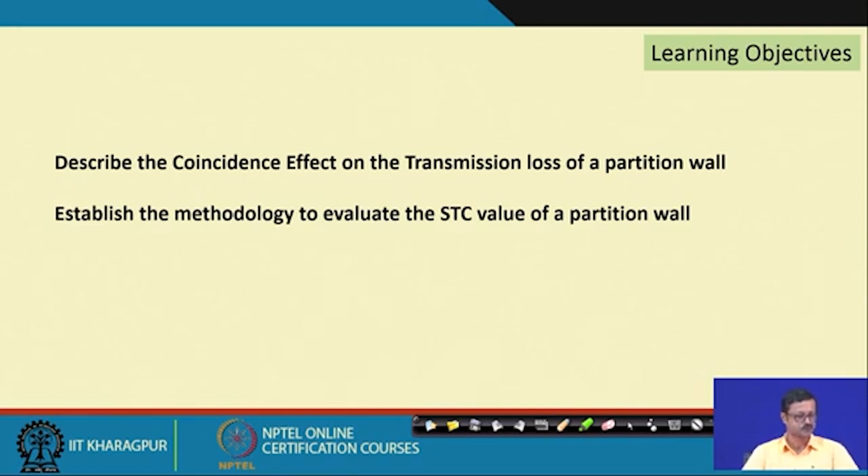Quickly let's go to the slide we already discussed in the very first lecture of our sound transmission, airborne sound transmission. This transmission loss, TL, depends upon two physical parameters. Of course there are various others, but these two are very important and very significant. One is surface mass of the partition wall, and another one is the sound frequency.

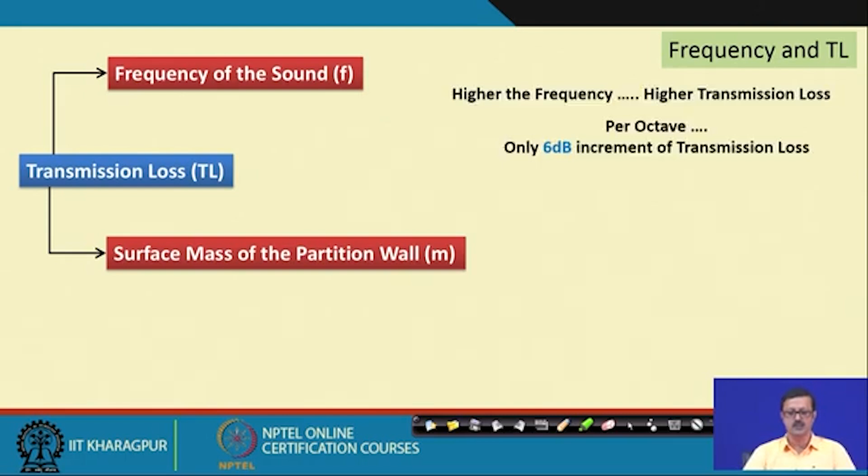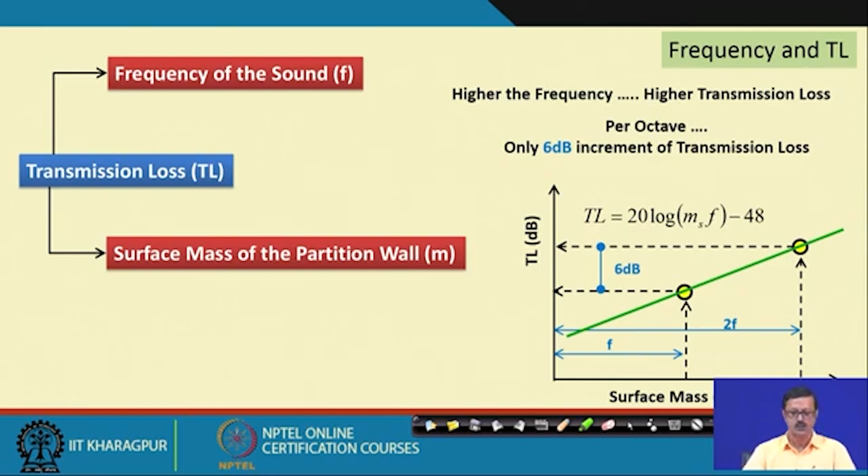As we understand, per octave increase in sound frequency, if it is doubled from the lower one, the transmission loss is increased by 6 dB. This follows a kind of steep straight line graph, where you can plot the frequency on the x-axis and the sound transmission loss on the y-axis, and you can see the transmission loss follows this particular straight line.

But in actuality you will follow this green line where there is a sudden flat plateau and then again there is an increment. If you produce this line with the blue dotted line, this is the TL, the transmission loss as per the Mass Law, and this green line indicates there is a slight change in the TL as per the frequency change, with a kind of plateau available here.

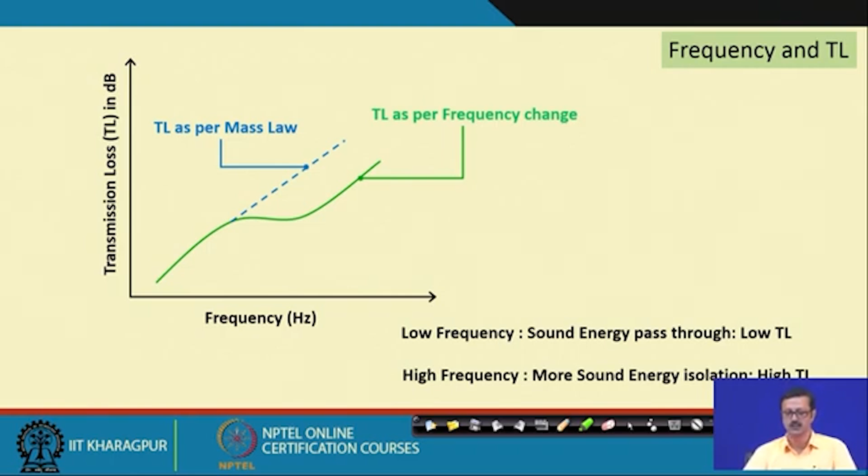It is also true that the sound transmission loss is low in case of low frequency. So the sound energy passes through more in a low frequency, whereas at high frequency less sound energy passes through, so there is a high TL value, or sound energy isolation is very high.

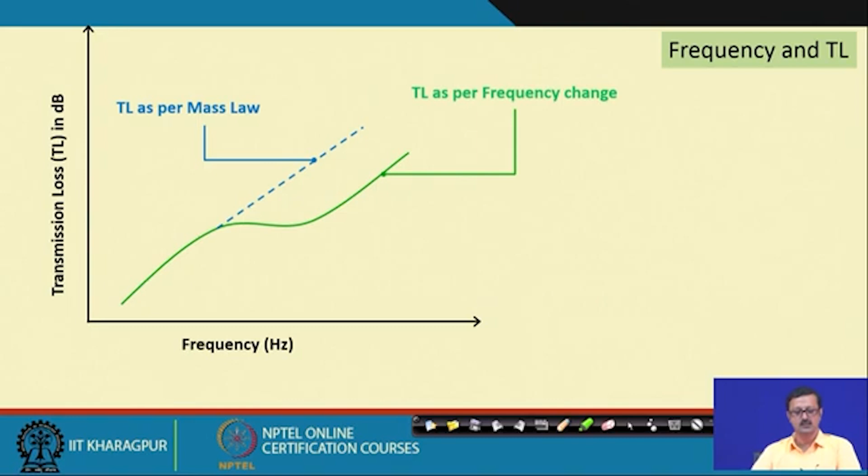Next, try to find out why there is a depression, why this particular kind of change occurs, and what is the significant role of this change in a partition wall. We can see there are three such geometric parameters. One is this dip, which is called the coincidence dip, which is almost about 5 to 15 dB, and this is the width of the plateau, how long the plateau is, whether it is shorter or longer.

It depends upon the damping of this partition wall, how much damping of the sound is going to occur. And this plateau height, or this coincidence dip, this plateau height in this particular coincidence dip depends upon the stiffness of the partition wall, how stiff or rigid it is.

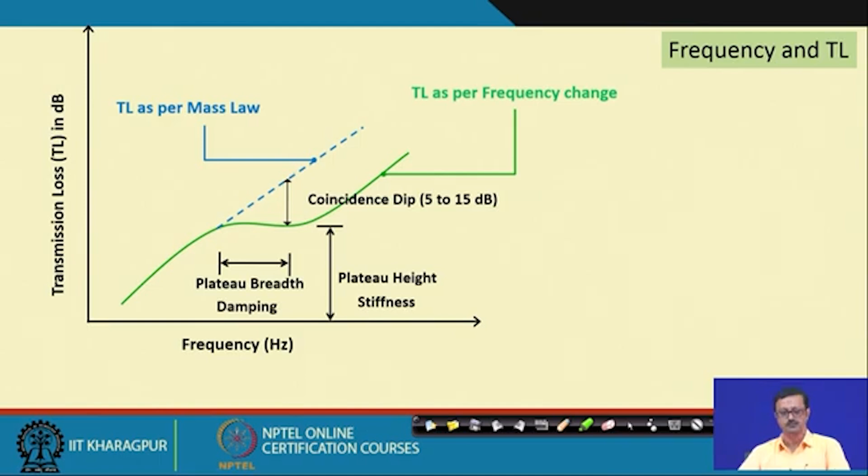So these three phenomena give us an understanding that even if the frequency increases, the transmission loss is going to increase, but it is not the same for all the range of frequency. Somewhere there is a kind of jerk, and then it again follows a particular straight line, and this particular phenomenon is called the coincidence effect.

The coincidence effect is that, suppose there is a partition wall, and by virtue of the partition wall's mass, stiffness, damping factor, and all those physical parameters, it has a shear wave capacity or some vibration mode, and this vibration mode can be described with its natural frequency. If the incident frequency of the sound wave matches with this shear wave or the phase of this particular vibration, then the incident frequency and its own natural frequency match together, and there is a resonating effect.

Then the sound will pass through at a maximum amount, which is why there is a sudden dip in the TL value of the partition wall. So what happens is that any particular object has its own natural frequency, and if that matches with the incident sound wave, it passes a huge amount of sound because of resonance. This vibration of the partition wall coincides with the incident wave—this is called the coincidence effect—and due to that there is a gradual change, or a sudden dip, in this frequency and TL curve.

So, a normal frequency TL curve will look like this. Initially, in the short frequency range, there are lots of dips and undulations.

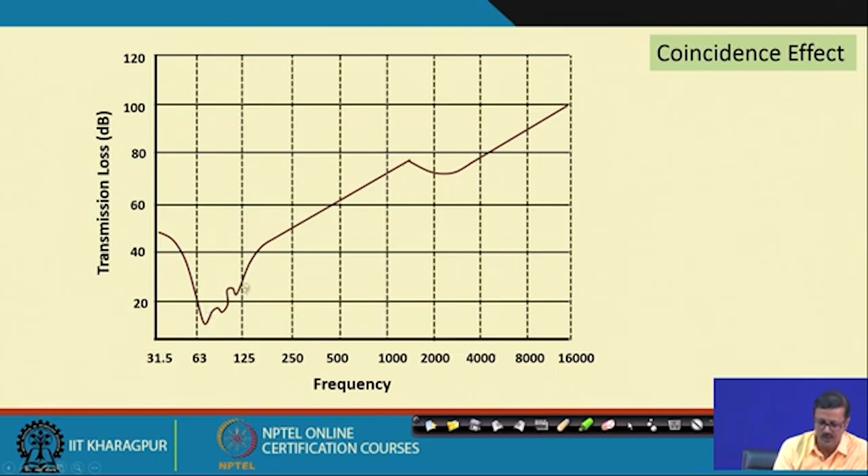This can be described as there being some kind of stiffness control and some kind of localized resonance that can happen. So that is where there are undulations.

Stiffness control means suppose a wall has the same surface mass, but it is stiffened at regular intervals by some structurally strengthened material.

Then this particular partition wall can act as very stiffened, very rigid, and it can have a kind of control in the particular frequency's transmission loss.

But if it is not stiffened regularly, only at the edges or maybe only in between and at the edges, then it is not that much stiffened, and there is a decrease in the stiffness and the TL values.

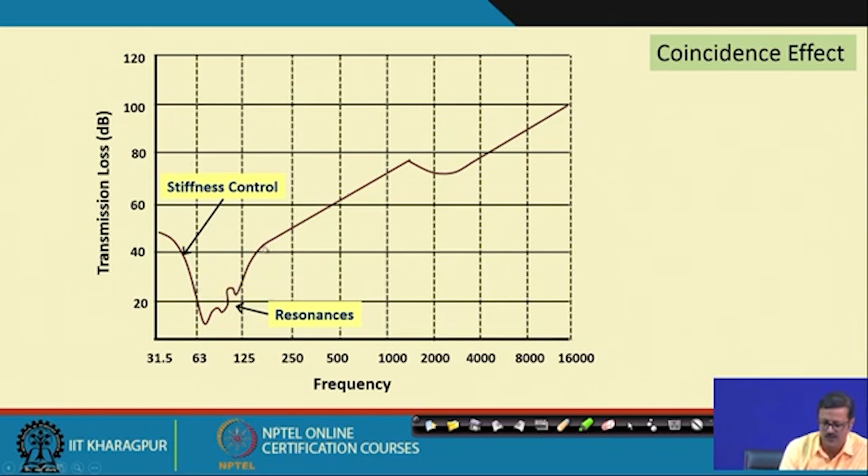But after a certain frequency, after a certain initial frequency band, if you leave this disturbance, it follows a straight line, and this is your mass law.

As per the mass law, there is a 6 dB increase per octave, or a 6 dB increase per doubling of the mass.

It will continue in some portion and then there is a dip, a coincidence effect. This coincidence effect initiates at a certain point and follows a dip or a plateau.

Then again it will follow the curve, which is 6 dB per octave, or the doubling of the mass curve.

So this line and this line are parallel, but there is an offset between these two lines. Now, the frequency where this coincidence effect is initiated is called the critical frequency.

That is the natural frequency, or the phase frequency, of the particular wall, which matches with the incident frequency.

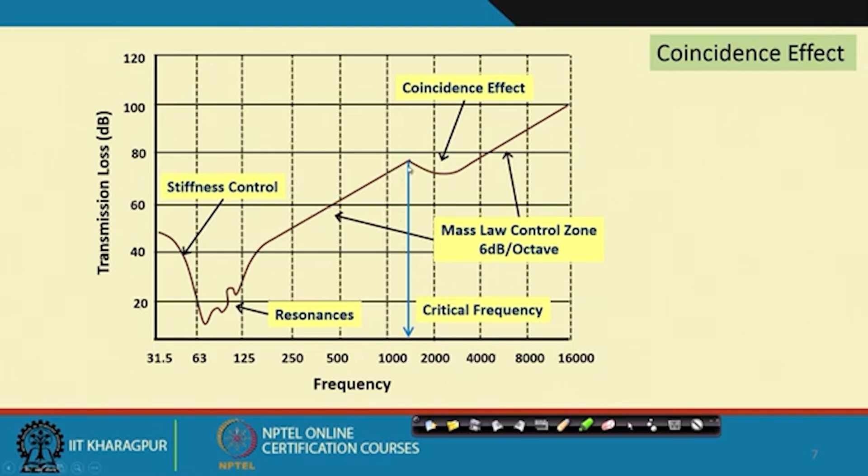So if you have a different partition wall of different material, this critical frequency point may be somewhere else, maybe 500 or maybe 4000.

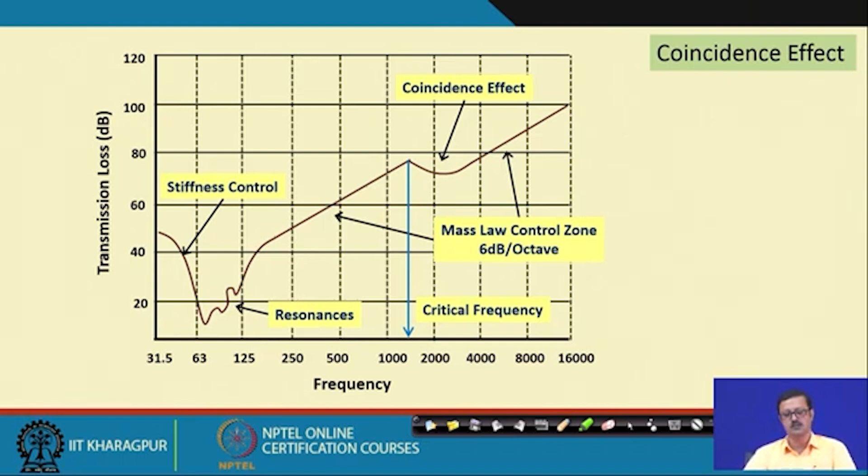So this may change depending upon the critical frequency point, because of the nature and the material of the partition wall.

So we are landed up in a problem. The problem is, number one, I need a single value of transmission loss to design a particular noise barrier or partition wall, a single value. Why a single number average value?

Because that helps me decide which partition wall I will use for my purpose, for my noise reduction.

But a single average value of the transmission loss is always going to mislead me. Why does it mislead me? Because it depends upon various frequencies.

Not only does it depend on various frequencies, there is also a critical frequency where there is a coincidence dip, and initially there is some disturbance because of the stiffness and damping. So if I calculate the average value for all the TL over the range of frequency, it will definitely mislead me.

But what is the way I can find out? So still we are depending upon a single number transmission loss. Some methodology has to be established that can

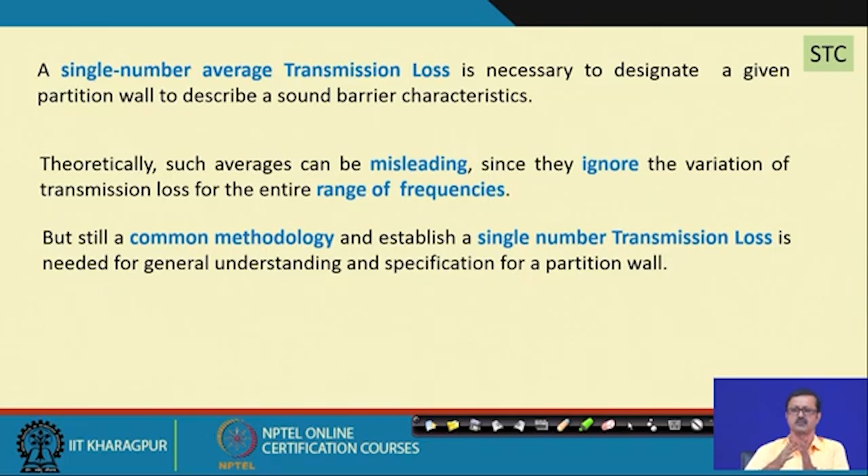That gives me this much amount of sound reduction or transmission loss.

So for that, a standard system has been developed in the United States, and that is called the Sound Transmission Class, STC, via an STC contour. And this particular STC contour was developed with a proper

straightforward and step-by-step order methodology by the ASTM, the American Society for Testing and Materials.

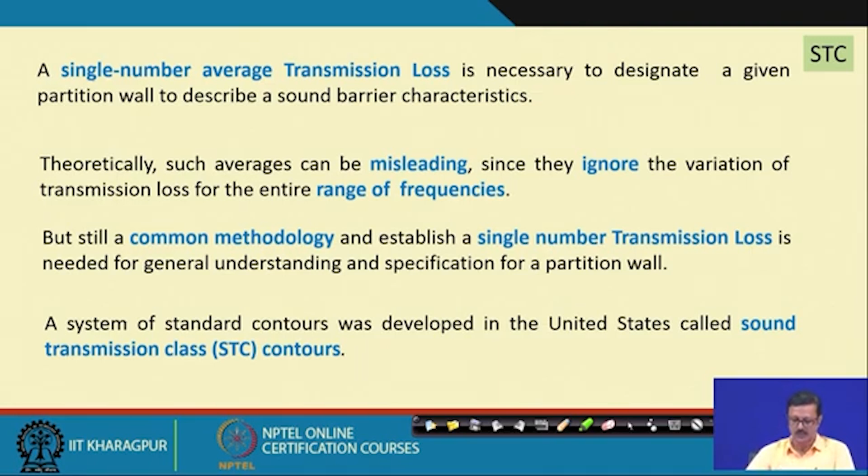So we will discuss the steps, the way this STC value of a partition wall can be formulated and found out.

Any kind of partition wall product manufacturer and lots of organizations that actually provide those kinds of solutions for partition walls, or acoustical solutions for rooms, they actually go for this STC number or STC rating of the partition wall

while designing any kind of enclosure.

So there are 5 or 6 steps. The first one, we have to test a particular partition wall in a laboratory for various frequencies.

And the frequencies are 16 frequencies. It starts from 125 hertz to 4000 hertz. So these 16 frequencies are all one-third octave band frequencies between 125 and 4000 hertz.

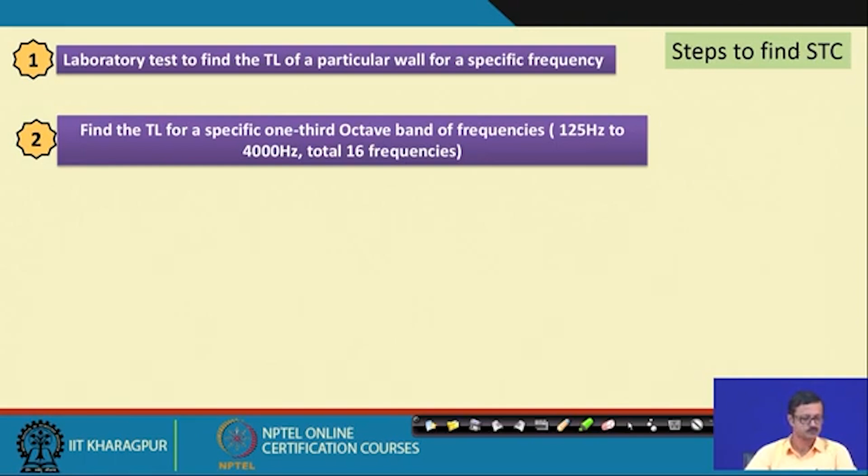Then we have to plot a graph between frequency and TL. Then we have to overlay an STC contour, because this graph which we will plot in step number 3 will be a very haphazard kind of graph. So I have to slice off some of the points and smooth this graph with a contour made of different segments of straight lines, and I will find out the STC contour.

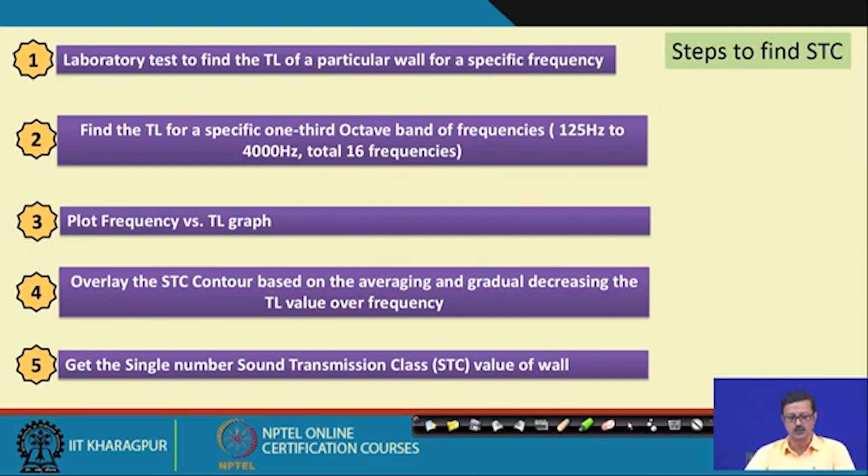The fifth and final step is that from that STC contour I can get a single value, and that single value is what I want for the STC value of the wall. So all these steps have some typical methods or rules, and we will describe those rules one after another.

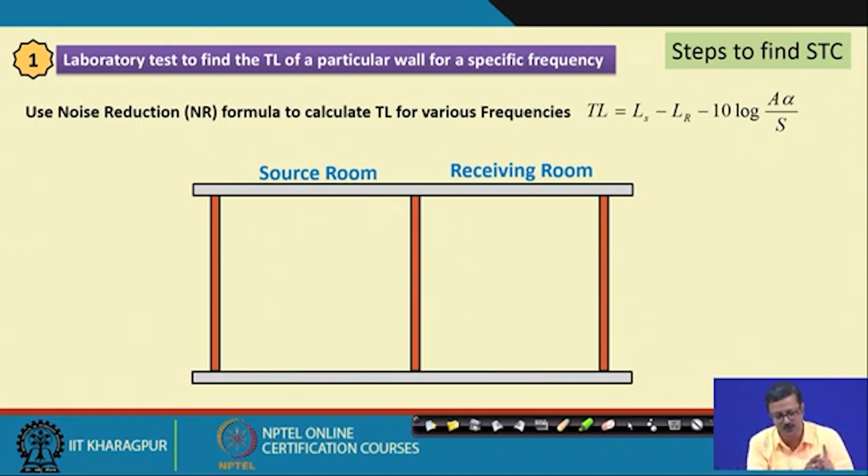The first step is that we have to test the partition wall in a laboratory, using the formula from the previous lecture: TL equals Ls minus Lr minus 10 log A alpha by S. This is the equation, and if I have a microphone at the receiving room and a loudspeaker in the source room...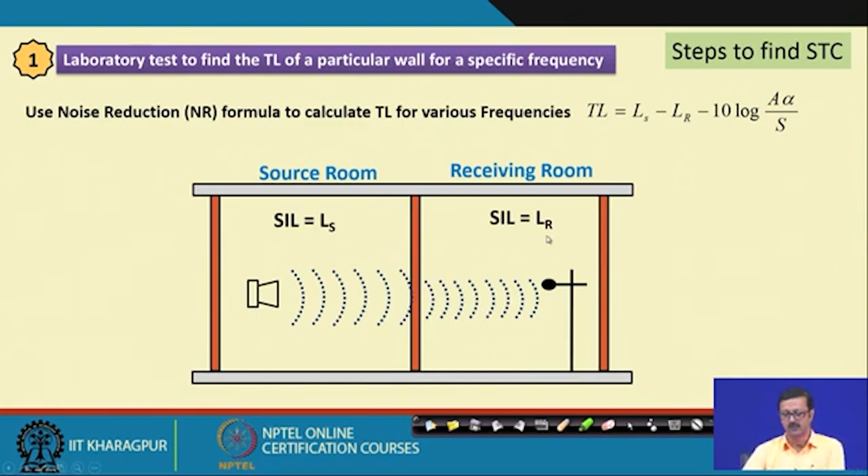I can find out with a dB meter what is Ls, the source room intensity of sound, and what is the level of sound in the receiving room. Knowing these values, As, alpha, and everything, I can find out the TL values. With the TL values, I have a table listing all 16 frequencies, and I find the corresponding actual TL value for each of the 16 frequencies, ranging from 125 to 4000 hertz, covering the 1/3 octave band.

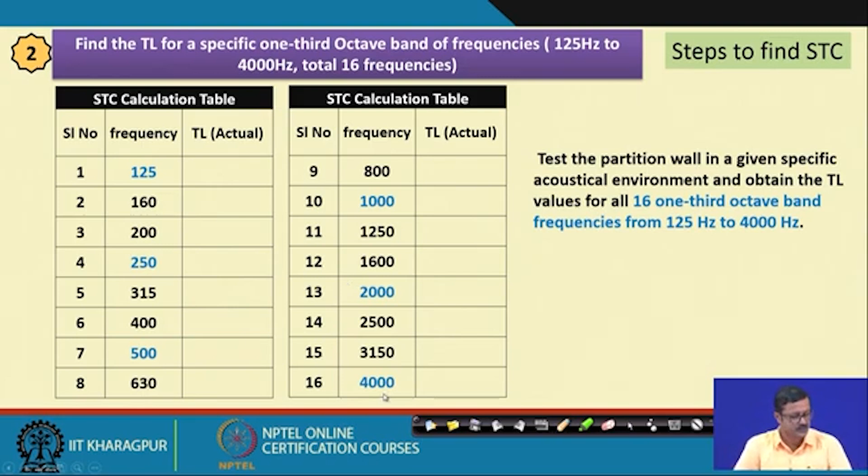Out of that, these blue color ones are the octave bands, 125 to 250, with two 1/3 octaves in between, and 250 to 500 there are two octaves as 1/3 octave, like that. So these 16 frequencies and their actual TL values have to be plotted.

After you plot frequency versus TL for those 16 octave frequencies, you get a graph of this nature, a very haphazard kind of graph. But even though it is haphazard, there is a tendency of moving up, meaning this is a positive kind of graph. So as the frequency increases, your TL values increase, but it may not follow a straight line.

Probably at this particular point we follow a straight line, but there is a kind of disturbance here, a dip and disturbance, and another disturbance maybe because of the coincidence effect. So there may be one or two coincidence effects also. By virtue of the actual plot you get that graph. But as I told earlier, just taking the average of all those values will not help me, because there are phenomena like the coincidence effect.

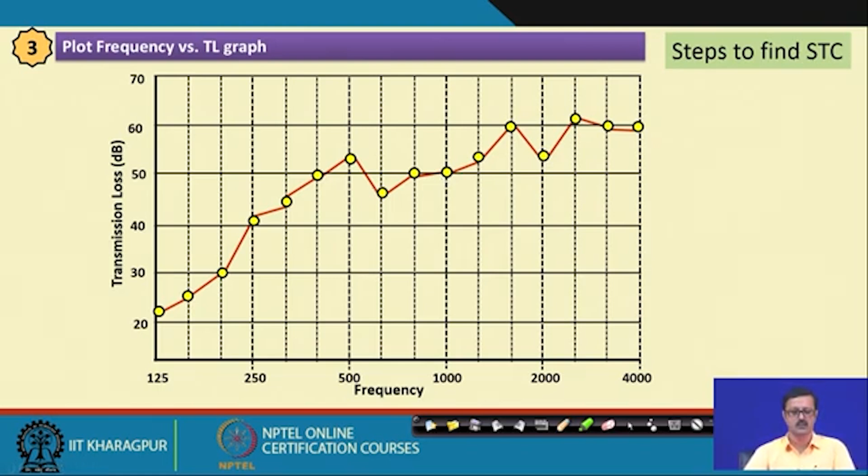So we have to go to step number 4, where I will overlay an STC contour on that. I will cut off some of the points and try to fit straight lines using some method.

What is the method? In step number 4, first calculate the average TL value for the last 6 1/3 octaves, that is 1250 to 4000. So you find the average of these last 6 TL values, and you plot the line.

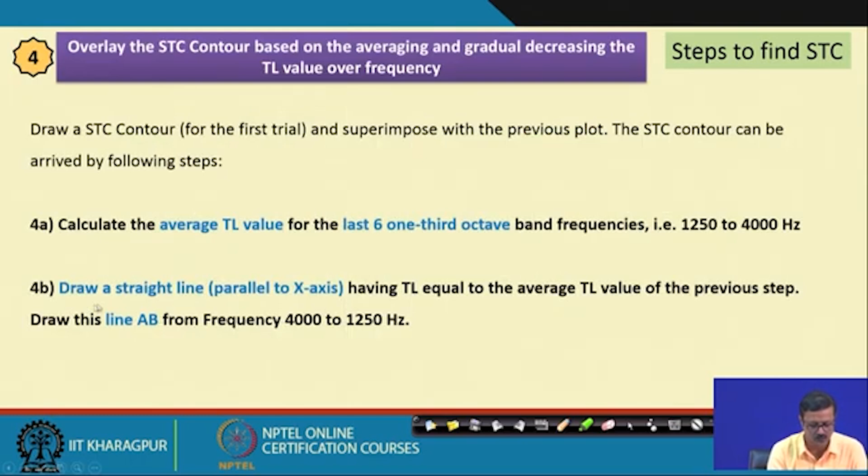Draw a straight line parallel to the x-axis, and find this AB line, which is actually the average of those values. So some points will be above AB, and some points will be below AB.

Now let us go to point 4C: plot point C over the 400 hertz frequency line, 5 dB below the AB line. So you plot point C at the 400 frequency line, below B by 5 dB. You see, from this 1250 blue line to this 400 blue line, there are 1, 2, 3, 4, 5 gaps.

So, the 5 gaps mean per 1/3 octave there is a decrease of 1 dB. So I got point C, and I will join the line segment BC, which is inclined, having 1 dB reduction per 1/3 octave.

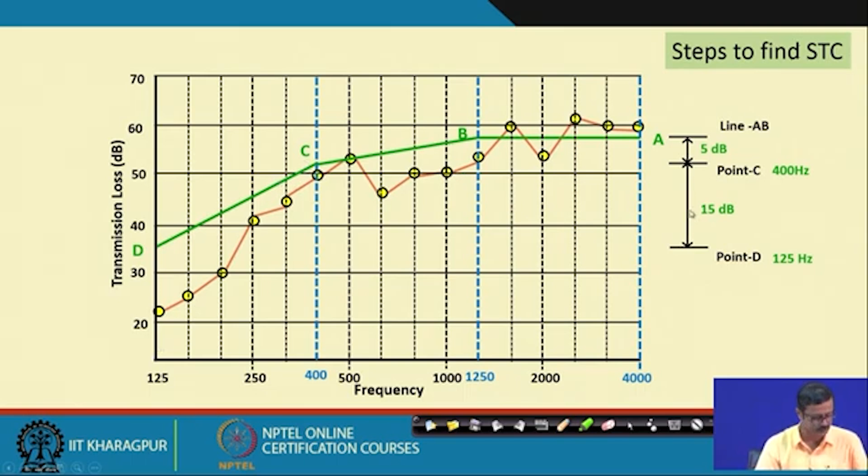Now I have to go to point D. Point D will be at 125, the last line, and the drop will now be 15 dB. This is again an inclined line, C to D, and from 400 to 125 there are 1, 2, 3, 4, 5 gaps, so per 1/3 octave there is a 3 dB decrease. So you plot D over 125, 15 dB below, and join point C to D. The line segment CD is also inclined, having 3 dB reduction per 1/3 octave.

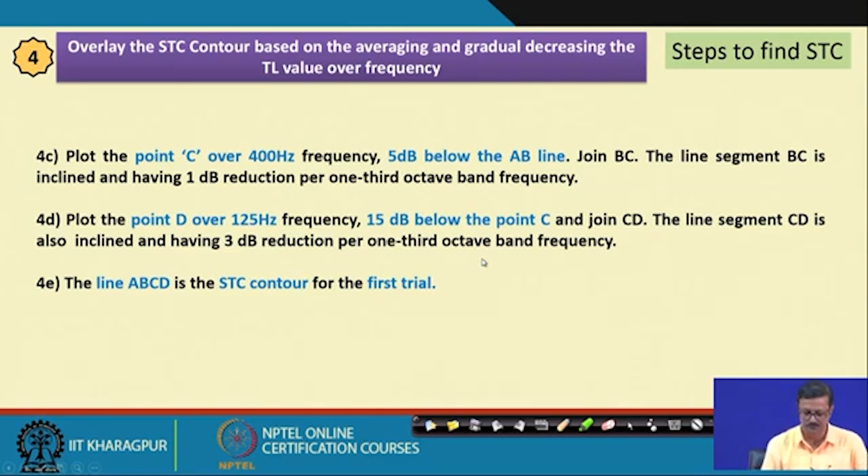So your ABCD, the STC contour, is completed. What I did is take all those haphazard points and, in a disciplined manner, formulate a contour, the green contour line, which is the STC contour. But this is not final.

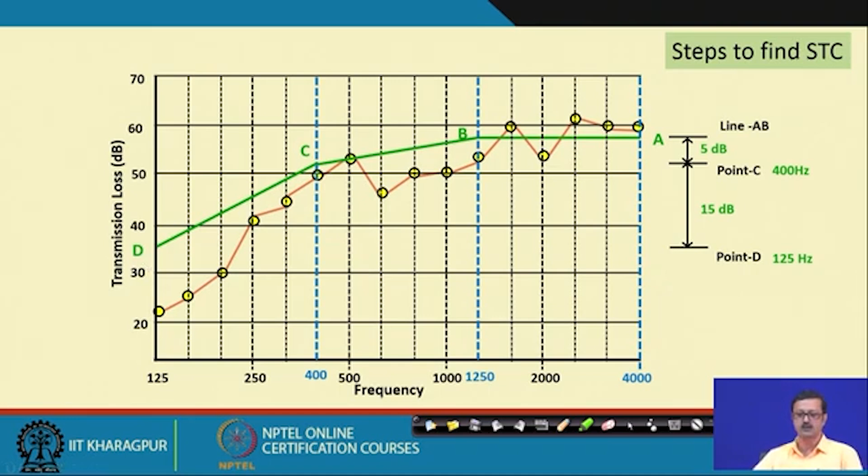You have to see some criteria. To get a single number for this STC, we have to find out some criteria. In step 5a, we identify the frequency having the magnitude of deficiency. What is the deficiency? The deficiency is the difference between the STC contour and the TL value.

So I got this contour ABCD, and this line is somewhere floating above and somewhere maybe dipping below the actual TL points. If it is floating above, there is a deficiency. So deficiency is defined as STC minus the actual TL. These are the deficiency points, but this is not a deficiency where the TL is above your STC contour.

So you have to find out this deficiency in step 5b: the sum of the deficiencies has to be calculated. What is the total amount of deficiency for all the 16 bands? We have to find the total amount of deficiency and check two criteria. The first is that the sum of the deficiencies is less than or equal to 32 dB, and the second is that the maximum deficiency in any one band does not exceed 8 dB.

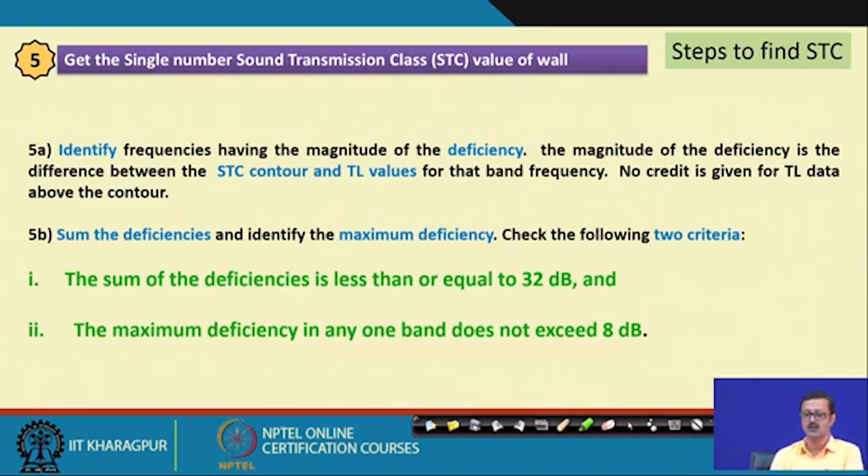Both these criteria have to be fulfilled. So the sum of all the deficiencies should be less than or equal to 32, and you have to check every one individually — the maximum deficiency in any single band should not exceed 8 dB.

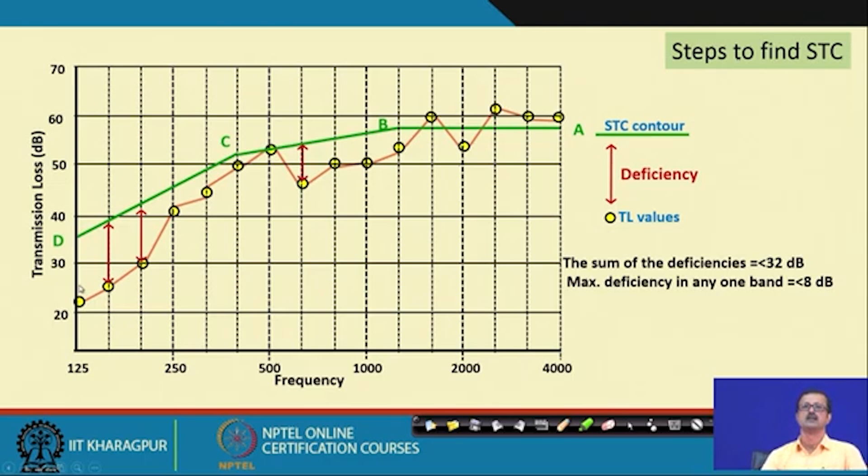At the final stage, step 5c, there are two situations. If both criteria are satisfied, we go to the next trial of the STC contour — we increase the trial STC contour by 1 dB, and recheck the criteria in steps 5a and 5b again.

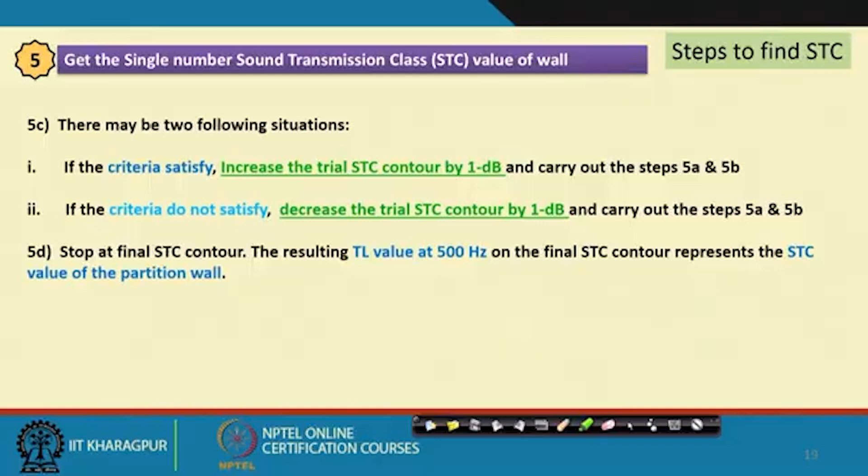Sometimes the criteria does not match — the actual deficiencies may not fit. Then we decrease the STC by 1 dB, and again recalculate steps 5a and 5b. It is a trial and error process, and finally we stop at a particular point where both criteria are fulfilled, and we find the STC value for the 500 Hz reference.

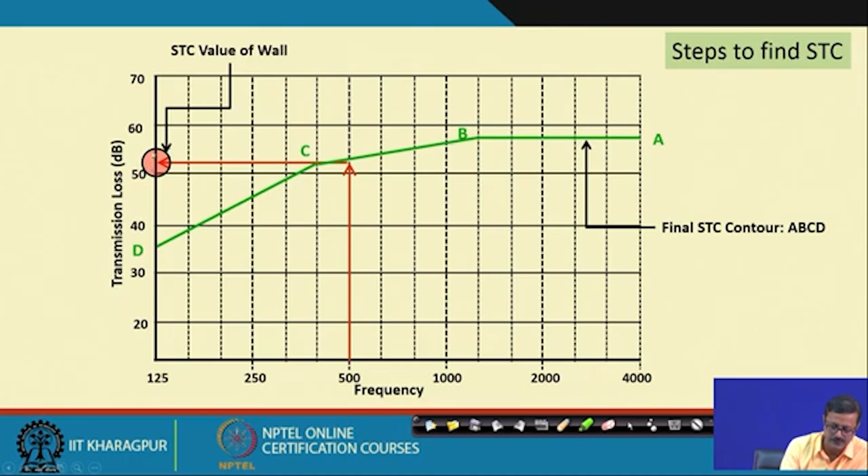So suppose this criteria matches — I have removed those points, and this is the final STC contour ABCD. Then, correspondingly at 500 Hertz frequency, the TL value will be my single value STC value of the wall.

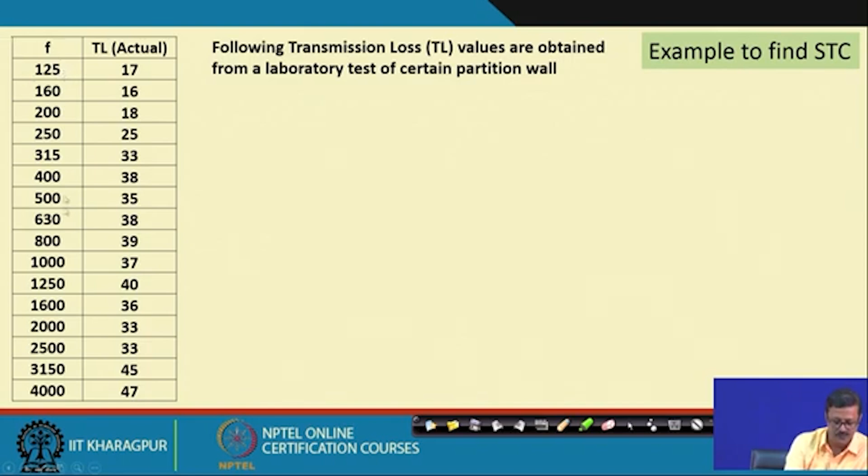So let us have a small example. In this example, I have written down the actual TL value of a partition wall from 125 Hertz to 4000 Hertz, all 16 one-third octave bands.

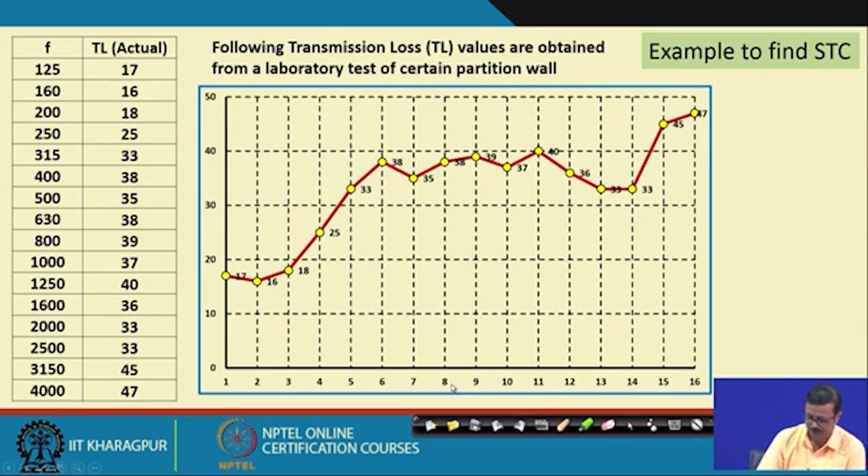If you remember the first step, what I did is take the last 6 values - 40, 36, 33, 33, 45 and 47 - and find the average, which is 39. So the average of the last 6 frequencies is 39.

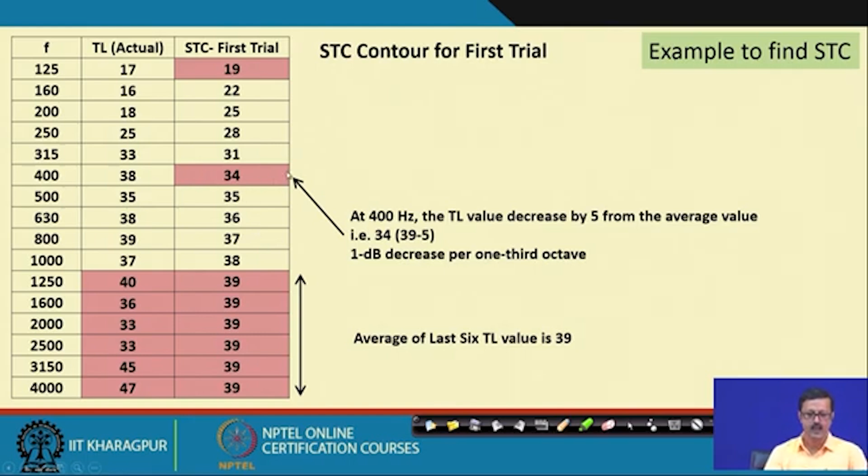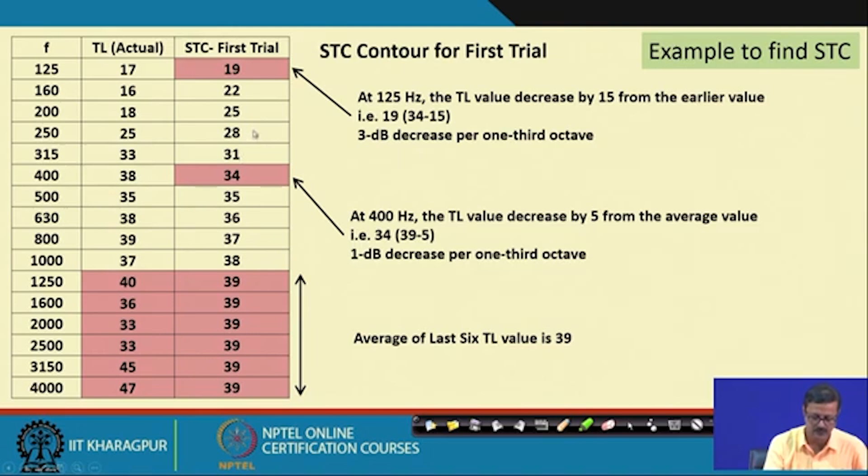Next, at the 400 frequency, the TL decreases by 5, so it's 39 minus 5, at 1 dB decrease per one-third octave, giving 38, 37, 36, and 34. Then at 125 there is a 15 dB decrease from the earlier value, giving 19, because 34 minus 15 is 19. There's a 3 dB decrease per 1/3 octave band, so the sequence is 34, 31, 28, 25, 22 and 19.

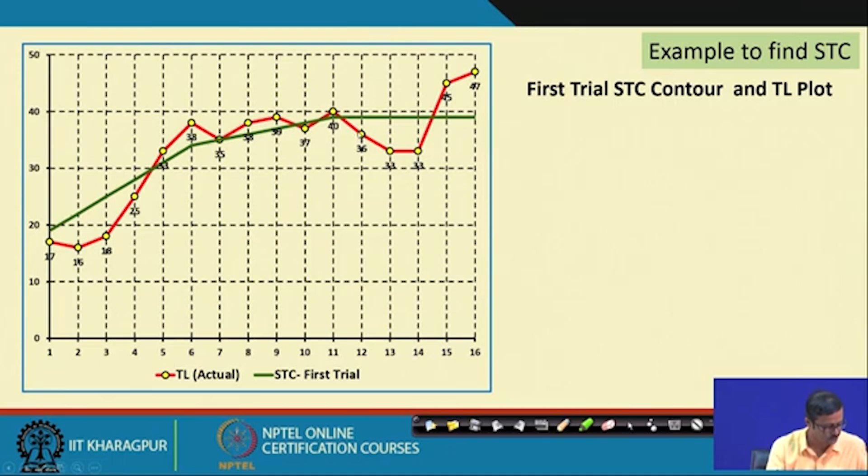The next step is finding the deficiencies. See here, this is above, this is also above, again above - these are above the STC line, and I'm not interested in those. I'm only interested in the dips - the deficiency from the STC line to the actual TL line. This is the coordinate I need to find.

So I found, for all the 1/3 octave bands, the actual TL value and my first proposed STC trial values. Taking this 17 and this 19, the difference 17 minus 19 gives a deficiency of minus 2, minus 6, minus 7, minus 3 - but here it's not a deficiency, it's an increment.

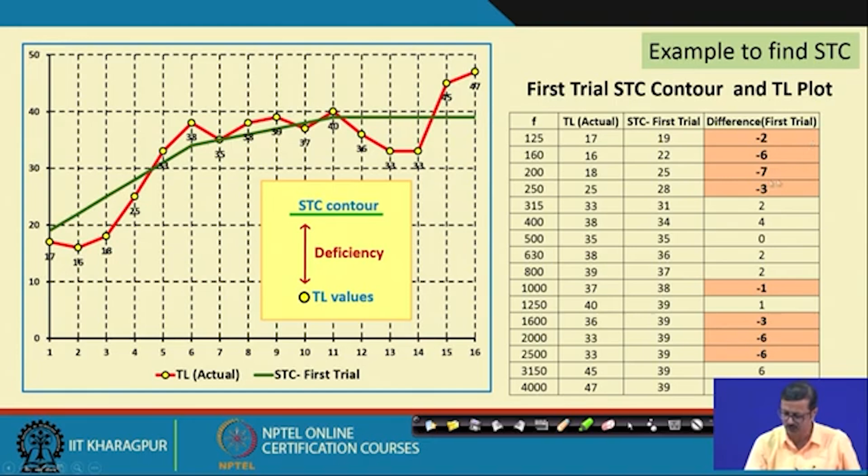Suppose it's the 315 band - this gives 33 and 31, so those are positive values, and I'm not interested in positive values, only the negative ones. So I took the full range of deficiencies, and for all those red or discolored cells I got the summation. In the first trial, the sum of all those is minus 34, so the total deficiency is minus 34 dB, and the maximum deficiency among these is minus 7.

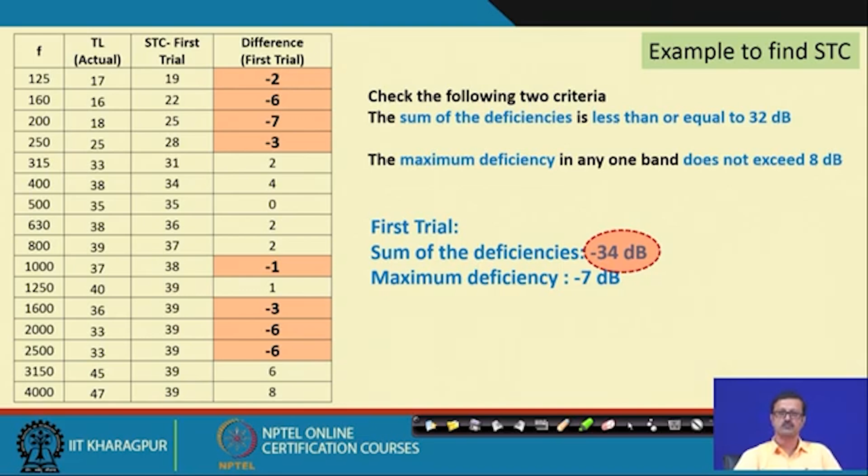So what are the criteria? The first criterion is that the sum of the deficiencies should be less than or equal to minus 32, but here it's minus 34, so I have to redo things. The second criterion is fulfilled - it doesn't exceed minus 8, it's just minus 7 - but the first criterion fails here since it's minus 34; it should be restricted to minus 32 dB or so.

So what do I have to do? The option is to go to the next trial - the second trial of the STC contour. This green line I developed has to be lowered by 1 dB, and if I lower it by 1 dB, the deficiencies will be less, so we have to recalculate.

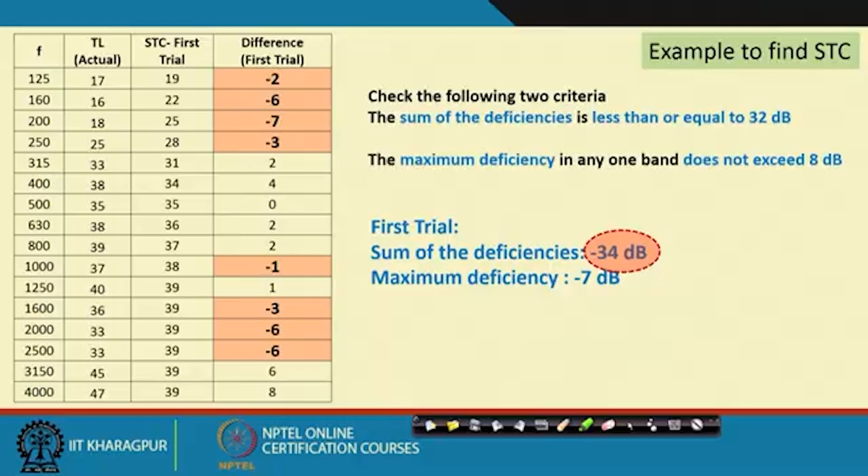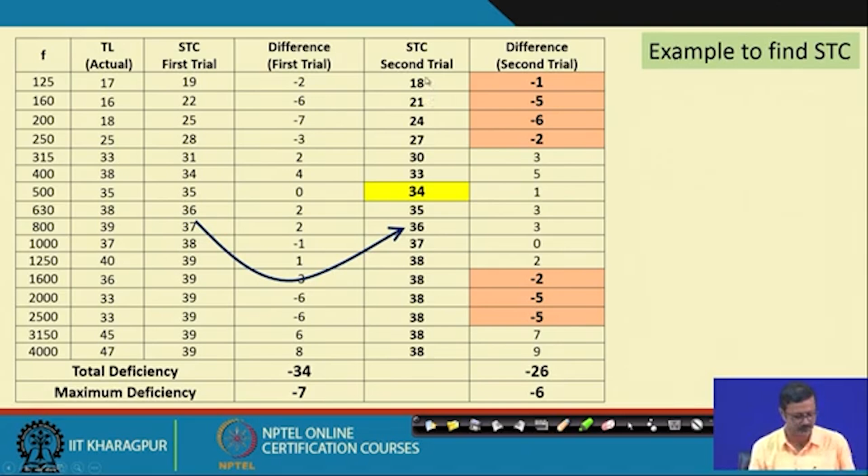Similarly for the second case, these are the new deficiencies, and adding them up gives minus 26, with the highest being minus 6 - both satisfy the criteria. Since both are satisfied, I can stop here, because going further would definitely still satisfy the criteria. So my second trial of the STC contour satisfies the criteria.

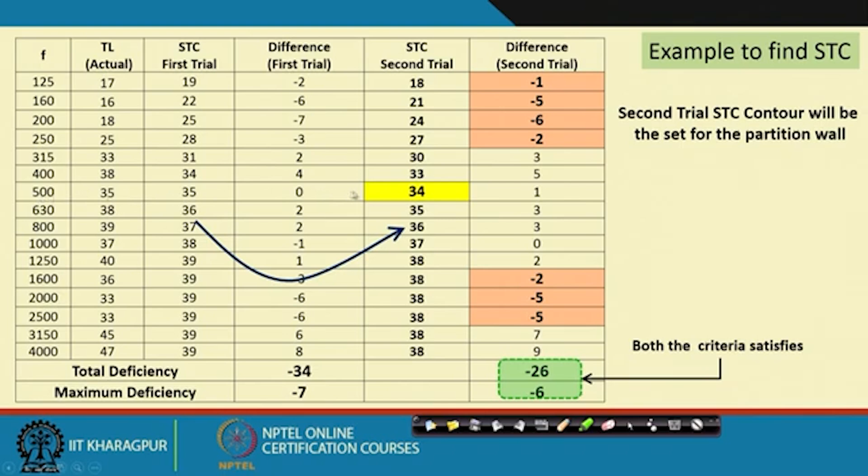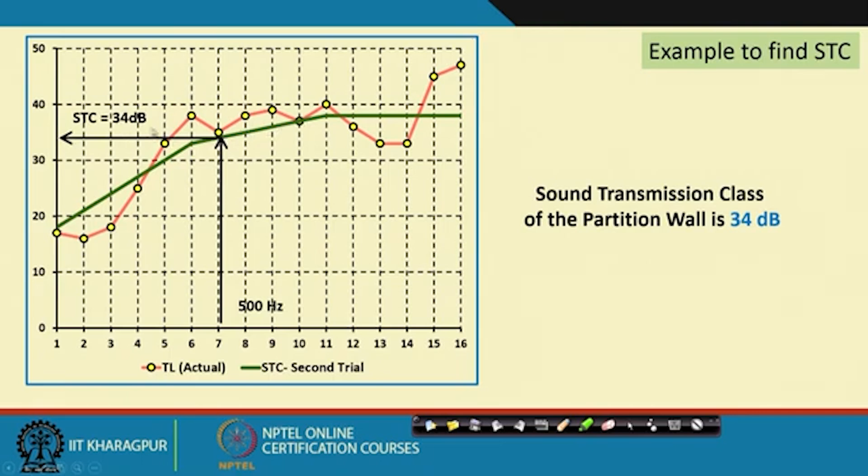So on this second trial line, the corresponding TL value at 500 Hz gives my single-number STC value, which is 34. The 500 Hz line striking this STC contour gives the STC value of 34 dB, and that's how I found the sound transmission class of the wall.

The next topic is if there's a hole in the wall. This hole will try to leak the noise, and it depends on how much noise leaks through it. Suppose it's a wonderful partition wall made with a double leaf and all that, and there's a hole - that may spoil all the effort to reduce noise from the source room to the receiving room. So it depends on the percentage hole area, SH by S1 into 100.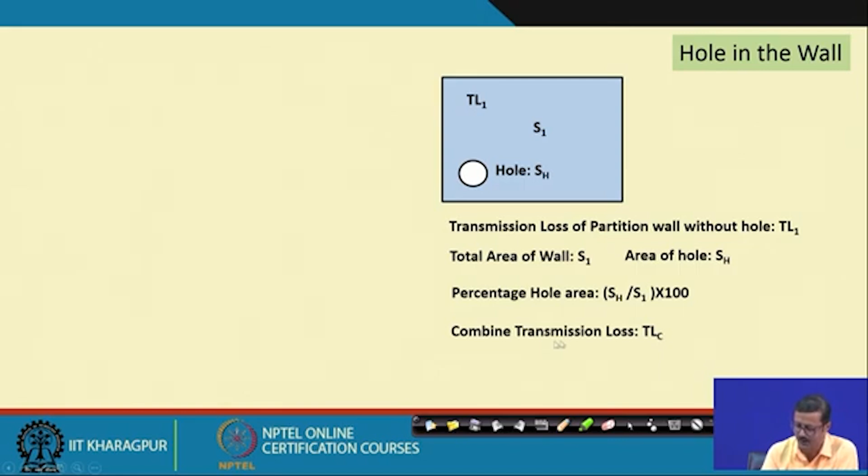What is SH? The area of the hole. What is S1? The total area. So this ratio, SH over S1, into 100, gives the percentage hole area. What is TL1? The transmission loss of the partition wall. And what is TLC? The combined transmission loss when there's a hole.

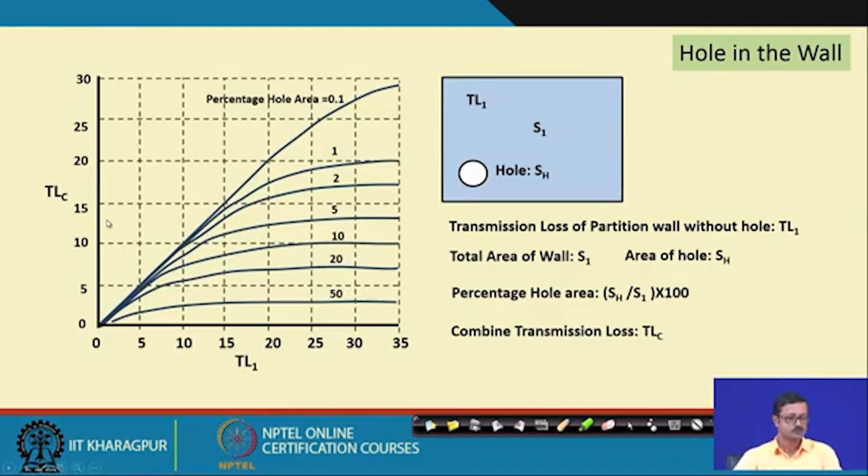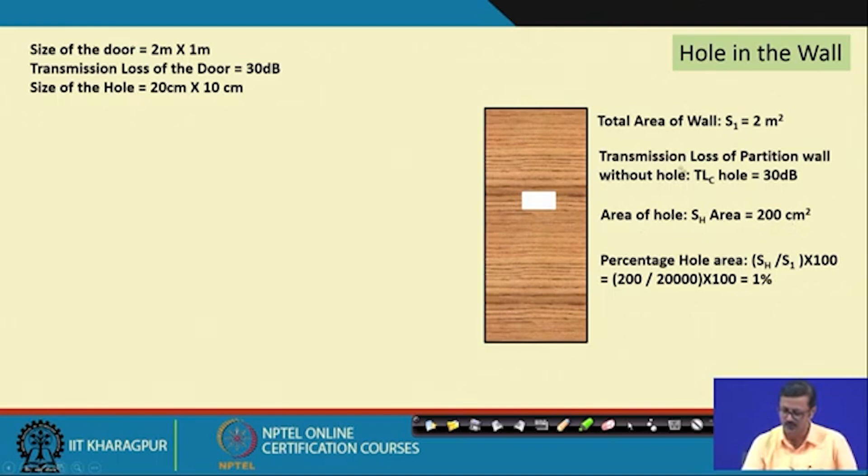Let us do a numerical problem. We have a door of 2 meter by 1 meter, and this door has 30 dB TL. There is a hole in that door which is 20 centimeter by 10 centimeter. So the total area of the door is 2 meter square, and total area of the hole is 200 centimeter square, and the transmission loss of the partition wall without the hole is 30 dB.

There is a small typographical error, this should be TL1 is 30 dB. The percentage of the hole area is almost 1%. So in that I have to see this 1% curve, the percentage of hole area is 1% curve, and as this transmission loss of the wall is 30 dB, corresponding to that percentage of hole area of 1%, it gives you the combined transmission loss as 20 dB.

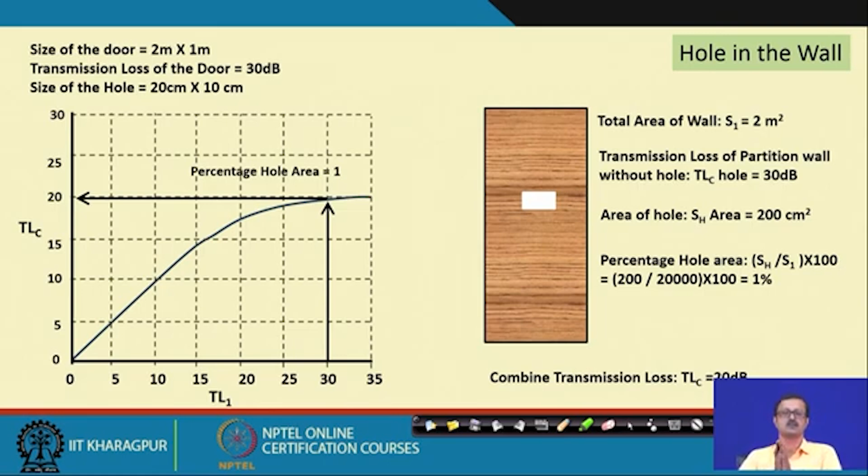So actually this particular hole of 20 centimeter by 10 centimeter over a door of 2 meter by 1 meter destroys almost 10 dB of sound. I mean, there is a leakage of 10 dB sound. So that is all for this particular portion.

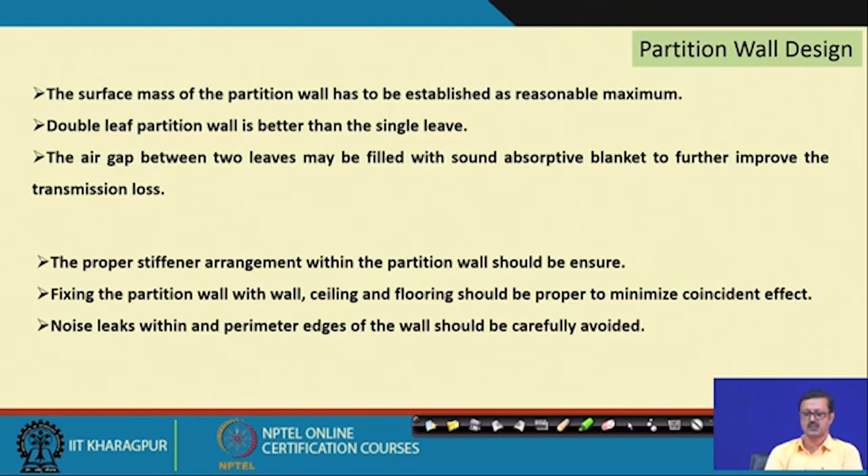The air gap between two leaves may be filled with some kind of acoustical blanket, which also enhances the total amount of transmission loss. The proper stiffener attachment will reduce initial disturbances, so the stiffener arrangement is required, and fixing of the partition wall with the wall or ceiling has to be proper, to minimize the coincidence effect in the middle frequency zone. Noise leaks have to be checked, because any kind of hole or noise leak causes a decrease in the potential TL value.

Let us go to the last page, where I have two homework assignments for you. One, please write down or try to understand the significance of the STC, sound transmission class value. Second, if the average TL value of the last 6 contours, the 1/3 octave frequency bands, of a partition wall is 35 dB, what could be its STC value if all the criteria is fulfilled.

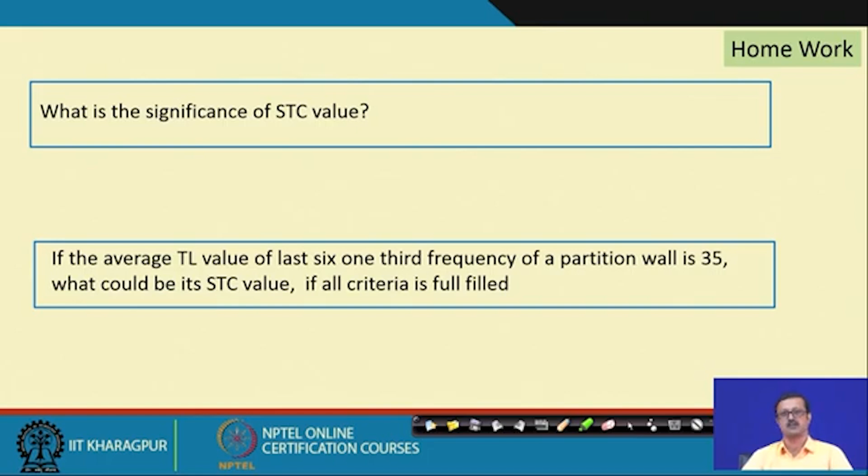That is all for today. The airborne sound transmission, with these 3 consecutive lectures number 31, 32 and 33, has now come to an end. In the next lecture, the 34th and 35th lectures, we will discuss about structure borne sound in this week. Thank you very much.